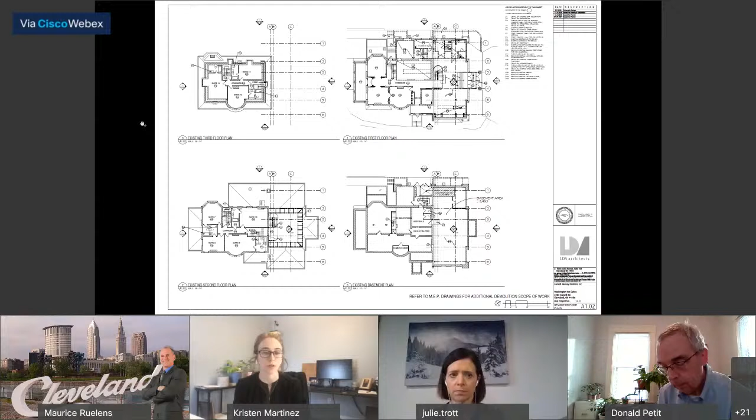Demolition plans, these are pretty much the same as what you guys saw the last time. The existing second and third floors were the previous hotel suites. Those will be remaining mostly as is, with the addition of some small kitchens and laundry areas where we're able to add them. Most of the work is focused on the first floor, adding in the 5 new apartment units. Next slide, please.

Basement plan, this is unchanged from what you guys saw at our last landmarks presentation. Next slide, please.

First floor, one of the big comments from the last presentation was keeping the existing porches that face Murray Hill and Cornell as is. So to do that, we've eliminated one unit so we can maintain the porches. We're leaving the glazing and the storefront as is. You'll still have that transparency between what you're seeing on the street and that stone wall of the historic building behind. And we think this is a better balance of keeping the exterior looking the way it is, respecting the historic, but also lets us respect the historic interior as well, especially the rooms that face Cornell and Murray Hill. So next slide, please.

Second floor, the only change from the last presentation is we've enlarged the sliding patio door plan south to get a little more glazing in. This was one of the comments that we picked up from Little Italy's design review. We are removing the majority of the existing 1984 skylight. We're infilling this with the little common area and adding a roof deck on top. Next slide, please.

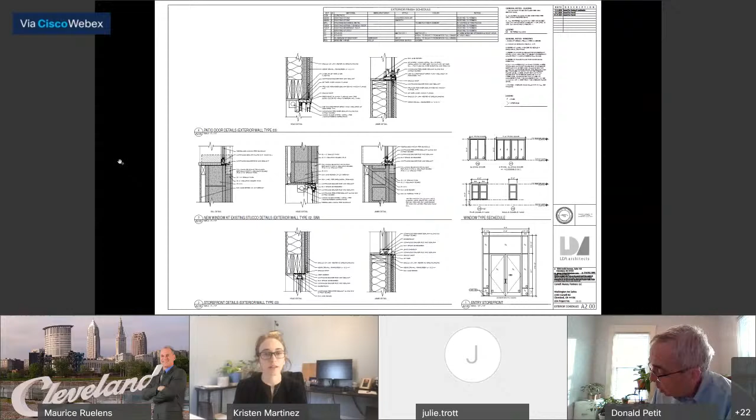One comment we picked up from design review was that instead of seeing a glass railing at the roof deck, they wanted to see a metal railing. So we're showing a dark metal, again that bronze color. This will be mounted to the back face of that partial height wall, just a thin vertical picket.

And then you'll see the modifications to the storefront entry below, removing that curved bulkhead from the 1984 portion, just brightening it up, bringing some more light into the building. Next slide, please.

This is the side that faces Murray Hill. Again, you'll see the common area deck to the right side. We are modifying that one door that's in the portion of the enclosed porch. We're leaving the glazing as is on the building porches, as well as the 1984 addition. That storefront will remain as is. We are replacing that one door—it's a pretty industrial looking door right now. We just want to pick something that's going to give it a little more of a residential feel. Next slide, please.

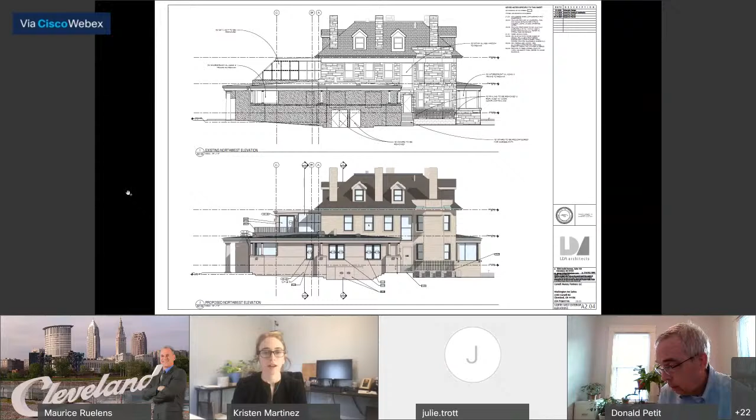The next few slides are sections. We can get into those as needed as we get into the discussion, but at this point, we turn it back over to the commission.

Thank you. Do we have feedback from the local committee?

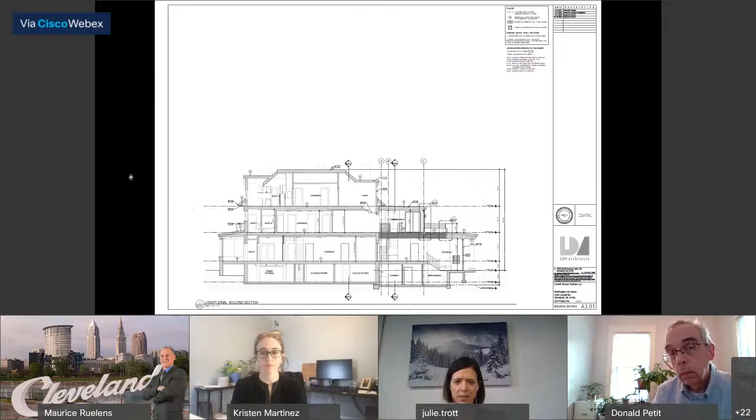I can report that I was at the Design Review Committee meeting on Tuesday. They approved this—well, I don't know if it was unanimous, but it was approved as presented. I think the applicants addressed all the major concerns of the committee and the commission from the last meeting. So it was approved by Little Italy Design Review.

Excellent, thank you. And did I see we have a councilman in attendance with us? Thank you so much, Madam Chair.

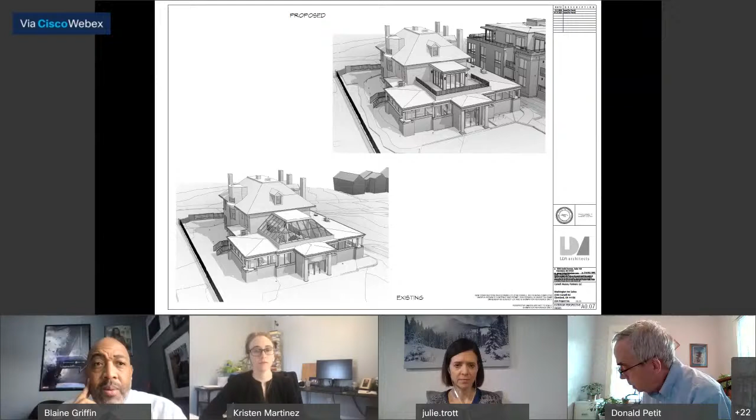I know that the Little Italy Redevelopment Corporation approved it, and I support their recommendation—I also approve. And I know that this is probably not the venue, but I do want to make sure this committee knows that the residents of that area are getting more and more concerned about the plethora of apartment buildings. I know this isn't this committee's responsibility, but I do want to make sure I let this committee know that residents are growing more and more concerned about the plethora of these historical buildings being redone, possibly not within the fabric of the neighborhood. So I'd be remiss if I didn't say that as a representative of the Little Italy community. Thank you, Madam Chair.

Thank you. Any other people in attendance to speak on behalf of the project? Okay, we do have Adrienne Bailey with her hand raised. All right, then we'll move on to feedback from the commission. Go ahead, Ms. Bailey.

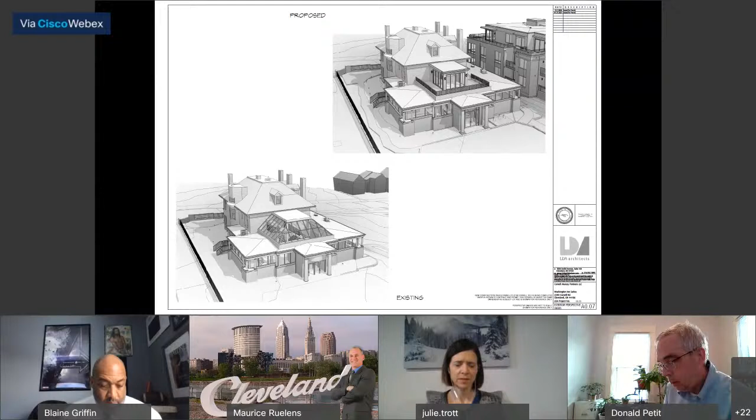I would like to thank Ms. Martinez for listening to the recommendation. I like what's presented, I just have a few questions material-wise from the existing to the new. As far as the existing finish, is all the stone for the whole structure being replaced with stucco, or is some of the stone remaining and just the new structures being replaced with stucco? That's what I'm trying to get an understanding of.

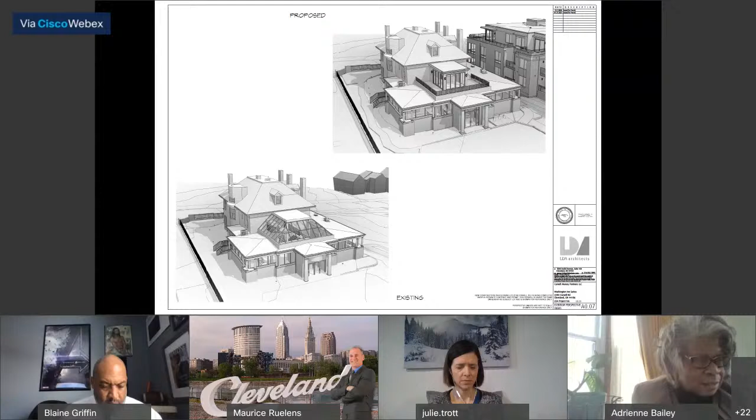We are not touching any of the existing stone. Existing stone will stay as is. I'm looking at your presentation, so just the new addition on the atrium infill would be the stucco. I'm just not seeing some of the stones showing on your presentation for your proposal.

That's fine. You did answer some of my questions for the common space, especially for the railing. Now is the common space going to act as a patio where individuals walk out? Will you have seating in the roof area, or will the common space seating be inside the new structure? A little bit of both. There's a patio area on the second level, as well as seating inside, so we'll have seating on the exterior as well. I would imagine there'd be a little bit of furniture out there.

What type of flooring is going to be used inside the structure? I'm curious what material you're using, inside the space as well as the roof deck. For the lobby area it's going to be tile. When we get into the residential spaces it's going to be carpet. It's existing carpet right now inside.

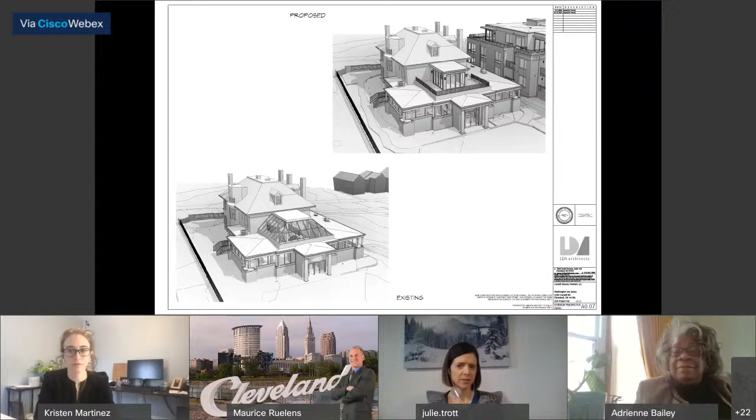Thank you, Madam Chair. I understand there is a high demand for rental housing in this area, there always has been, and because of the institutions nearby that will continue to be the case. I'm not enthusiastic about cutting up a stately, elegant mansion basically into 12 units. I understand the demand, it's just we've had a history of doing that in the city. We certainly cut up a lot of houses in Ohio City, Detroit Shoreway, Hough, and probably a lot of that exacerbated the decline of some of those communities. That said, in this area I don't think these apartments are going to not be desirable, but I don't applaud it. Again, I'll support it, but somewhat reluctantly.

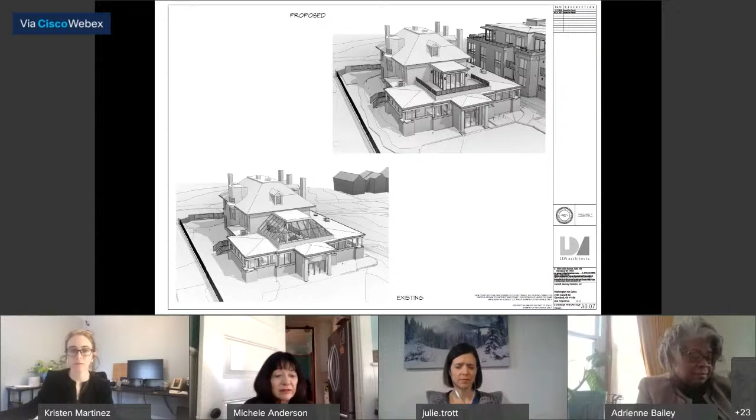Thank you, Ms. Anderson. Other questions or comments from the commission? Mr. Strickland? Thank you, Madam Chair. The only question I had was the fence on the eastern boundary of the project with the adjacent neighbor. Will that be replaced in kind, or will the fence material be different from what's existing?

It'll be different from what's existing. The existing fence is a cedar board-on-board style fence. This will be a green screen fence that'll allow some vegetation to grow up, similar to what we're using next door on the apartment building. The height is about 5 feet or so. It'll take some time before the plantings mature, but we're also showing some evergreen planting along that fence, so they'll be roughly the same height eventually.

Has that been previewed with the neighbor? Do you know their reaction to the replacement? The neighbor is actually under the same ownership group as this building. Oh, that's right, okay, thank you.

Other questions or comments from the commission?

I don't see any hands up. Oh, Adrienne again? Miss Bailey? I was gonna make a motion.

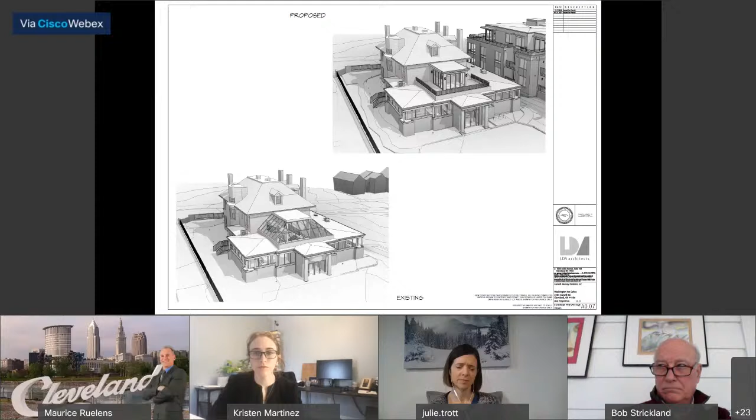Okay, go ahead, and then I'll make my comments in the next portion. Do you want to make the comment, then I'll make the motion?

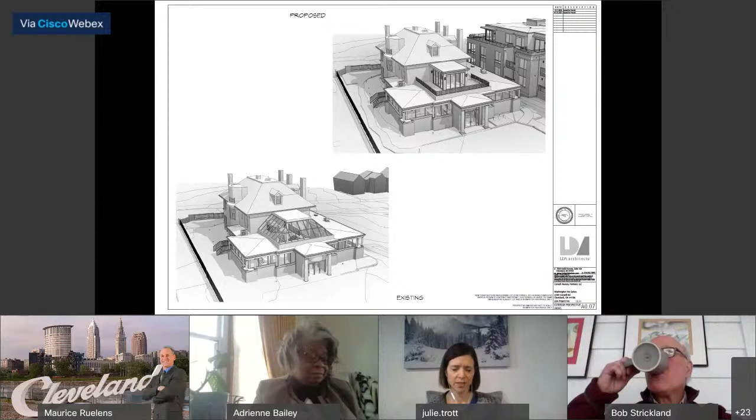Sure. I just wanted to say that I appreciate the ownership and the design firm listening to our feedback. I think we're all saddened that we're losing this for a more public use, but appreciate trying to maintain, at least from the exterior, the original or the current look and feel of the establishment. Those are all my comments. So go ahead, Ms. Bailey.

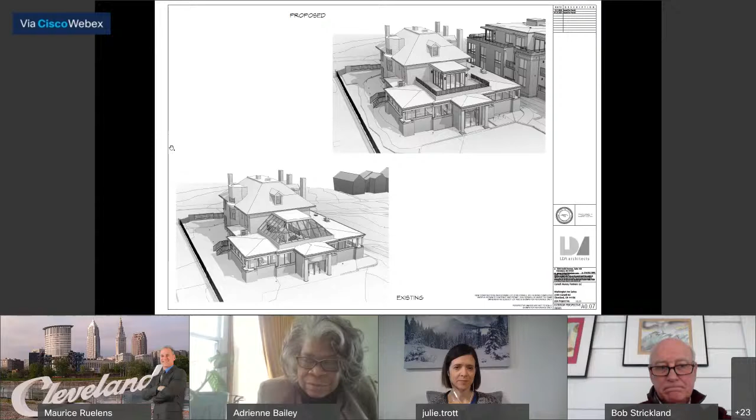I would like to make the motion to accept the presentation as presented. I would like the architect to give staff more information on the material, on the common space for the roof, the window information as far as color and materials, especially for the fence, as well as the ground fence. Could you give the color, even though the vegetation isn't on yet, it's going to grow in. I'm assuming there's going to be some color on it before the vegetation is on it, so share what color it's going to be, or the final color, with the staff. So that's what I have for now.

We have the motion on the basis of submitting additional information. Do we have a second? Bob Strickland, I'll second. So we have a motion and a second. Any further discussion?

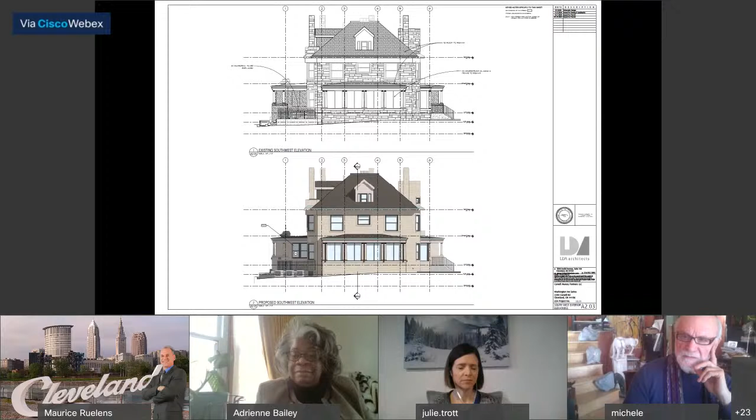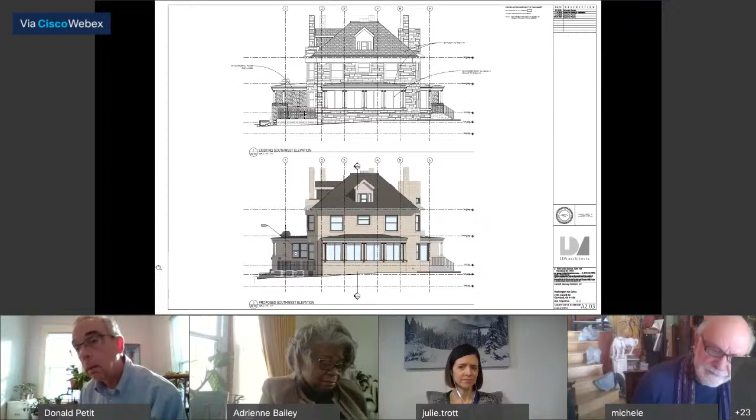Ms. Anderson, yes. Ms. Bailey, yes. Mr. Colicchio, yes. Mr. Dryer, yes. Mr. Strickland, yes. Mr. Tarasik, yes. Ms. Trott, yes. Madam Chair, the motion passes unanimously.

Excellent. Thank you. We look forward to seeing the progress. We'll move on to our second applicant, located at 500 West St. Clair Avenue, Waring Block. Storefront and entrance renovation for Aqua de Lucia Restaurant.

Could the applicant please use the raise hand function and unmute yourself and tell us about your project? This is Bob Bako with HSB Architects. How is everybody doing this morning? Hopefully fine. Good, thank you.

We were in front of Landmarks probably a month or so ago to present the exterior steel and glass canopy, which we received approval on. Now we're back in front of you today after a meeting and discussion with Tom Yablonsky in the Warehouse District. We're looking now to renovate a couple of storefronts, three storefronts along the West 6th and St. Clair facades. If you want to flip to the next slide, please.

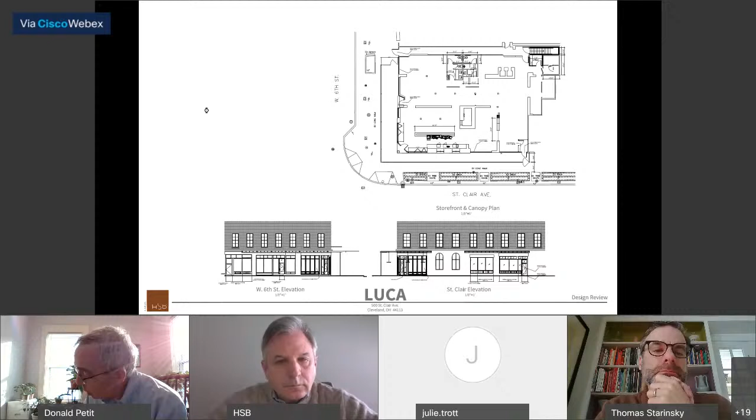So we've presented this to the warehouse district and received approval. Now we're coming to you to make sure that we're okay to proceed. Questions? Do we have feedback from the local design review committee?

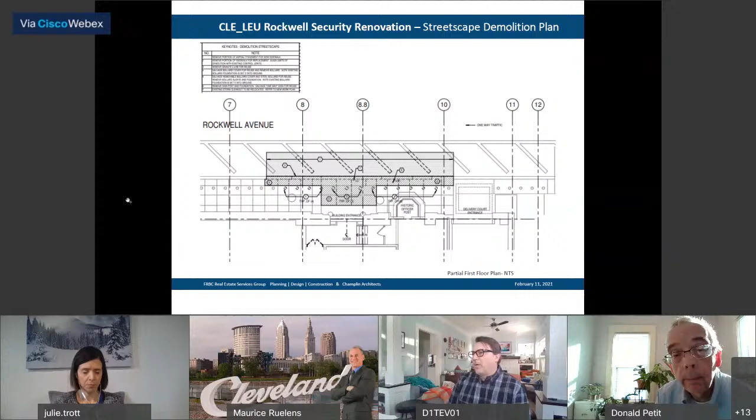This just shows the position of the officer post is centered on the entry. We're allowing 6 feet clear between the entry and the officer post. The intention, this is not intended to be a delivery door, it's just for the officers and staff or contractors coming in. We're actually looking to upgrade this entry for potential future use as a second entrance in addition to Superior, especially because of COVID, so that everyone's not entering into one spot.

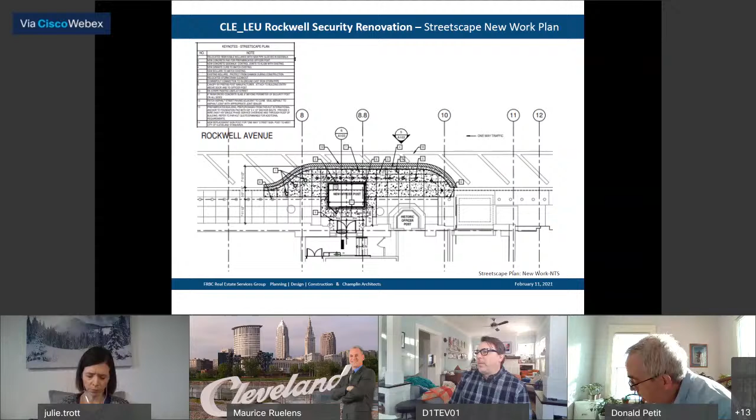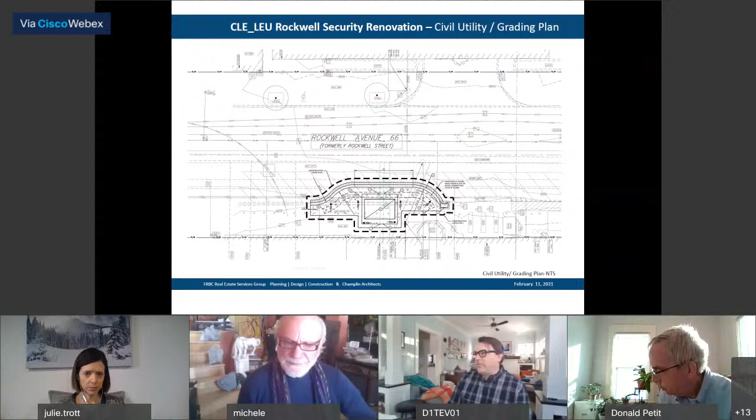There was a comment in the design review about why we weren't taking the entire striped off lane. Our security team was concerned that we were blocking this lane because it allows for some flexibility for vehicles. So we were trying to keep that bump out to a minimum to allow for flexibility in the future. We'd rather have that flexibility than the extended sidewalk.

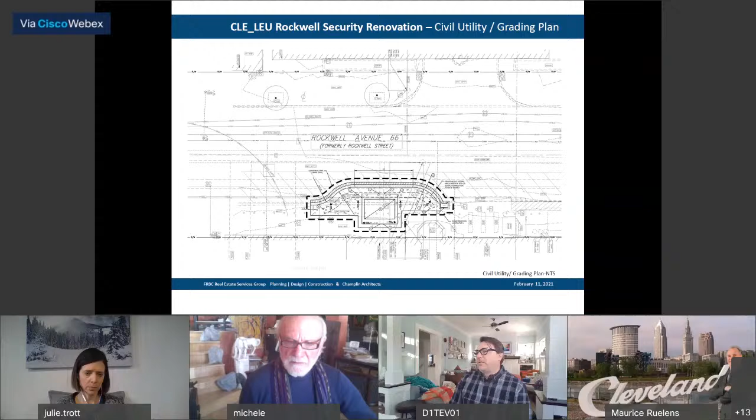There's also actually a 42-inch water main we're trying to avoid. This just shows you the curb detail. The intent is to do new concrete in the 2x2 grid to match the existing sidewalk, and then new granite or salvage granite for the curbs.

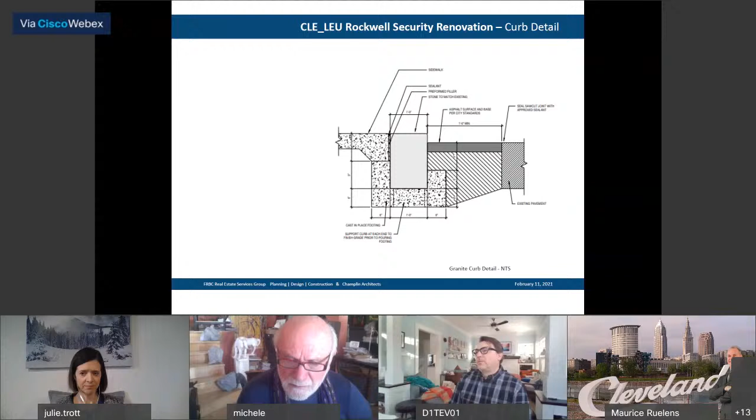The next one is the bollard detail. The bollards have to be quite sturdy for security purposes, so the footers are going down 5 feet. This just shows how we'll be reusing the bollards and also buying new to match.

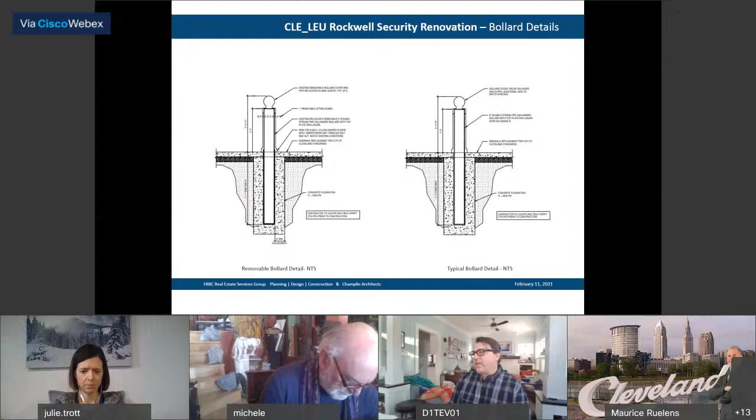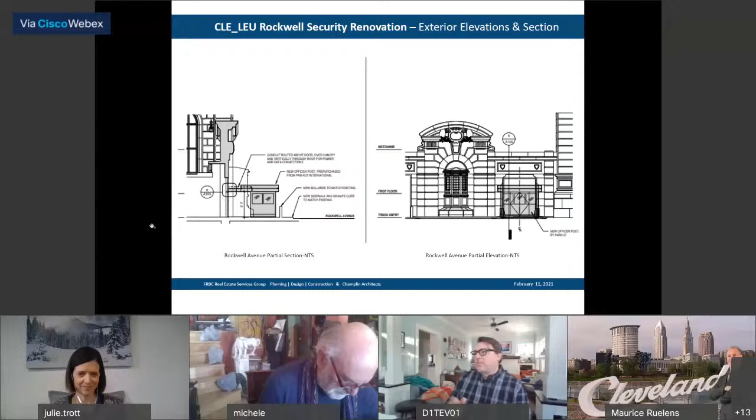This just shows you the only place we're touching the building is in the bronze panel infill, anodized bronze panel infill that was done in the 90s as part of the renovation. So this canopy, it's a 6x6 foot canopy connecting the pre-manufactured booth with the building, just to give officers some cover when they're going in and out of the building.

The design review had asked us about how that would be drained. We're pitching it back to the booth. We're not expecting a lot of water to collect on that, and there's a drain to the back of the booth that would be connected to the storm sewer.

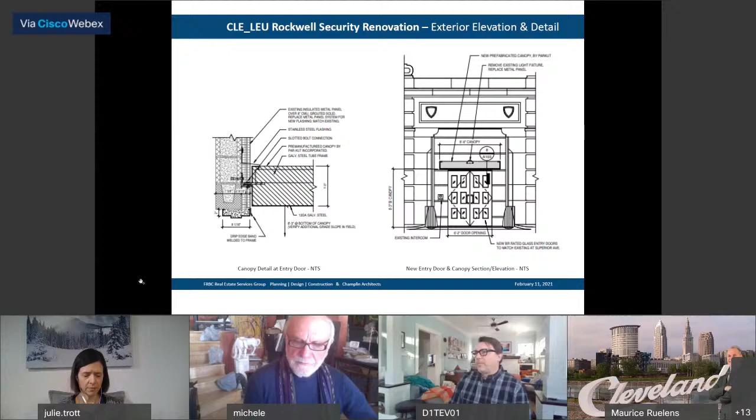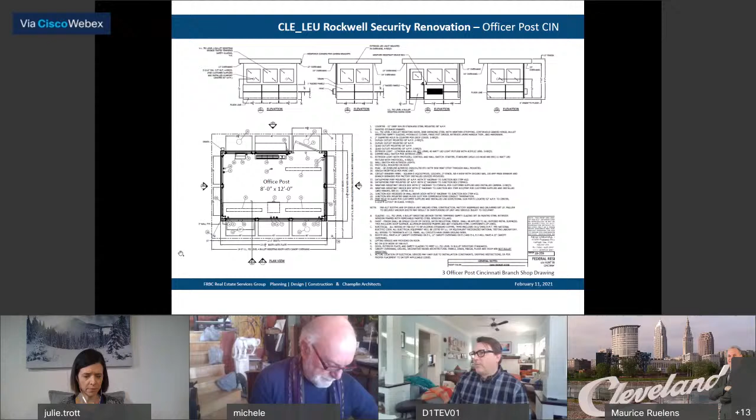This is just the shop drawing from the Cincinnati post, the 8x12, just to give you an idea of the dimensions and how it's fit out. Our post will have the double parapet detail to match the one we have. Per the design review comments last week, we're going to go with a horizontal banding that I'll show you in a rendering to tie in with the existing building.

That's it, that's all I have. Open to questions.

All right, thank you very much. And feedback from the local committee.

Madam Chair, this was reviewed and approved by the Downtown Flats Design Review Committee on February 4th. They did have some conditions, some of which I believe were addressed by Mr. Revider this morning. The conditions were that they study extending out the new curbing to provide more pedestrian space if allowable, detail the roof drain system and ensure rainwater is managed appropriately, provide details and design elements on the guard station which make it feel more contextually appropriate to the adjacent historic building, either in contrast or similarity, and that the design of the guardhouse should complement the new entry, with the design needing to be further explored as to how to better achieve this. It was approved unanimously with one abstention.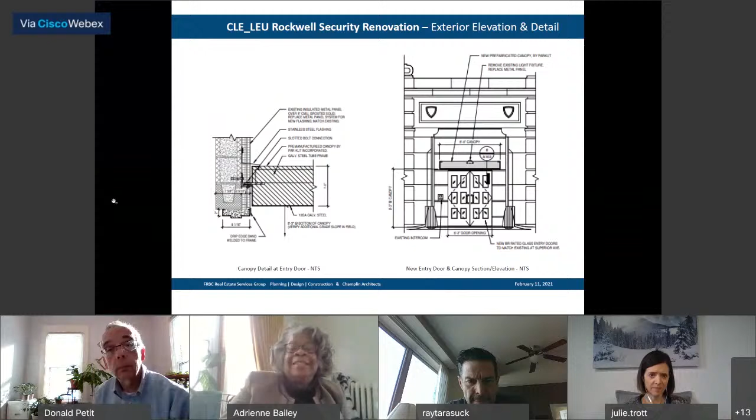I think that's the one. We'll back up for a second. I guess I want to see the one that is being removed, just to get some perspective. That might be on the previous slide. Yeah, right there. I walk by there every day, and quite frankly, now that I see these pictures, I'm embarrassed to say I'm losing my perspective on it. The one that's being removed is not the very first post as you're heading west on Rockwell. That's the second one.

We only need a single person to basically greet people and tell them, you know. Okay, that was my question. I was under the impression that was the one going to be removed, and I was curious how the traffic flow works, because I believe that's where traffic that goes in and comes out stops at that point. Exactly, so that one's remaining. It's the other one, and I realized it when I saw the overhead - I'll call it an atrium, that glass atrium, that's a little further down the building. Okay, thank you for putting that perspective for me, I appreciate it.

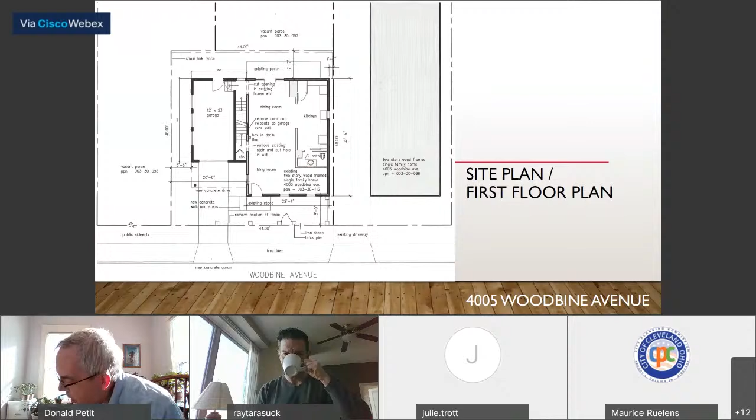That point was less than 6 feet. Please back up one slide. No, go backwards, one more backwards. Okay, this is the east side that was added in order to get sufficient height in the bathroom to be able to have a shower. We looked at possibilities of adding a stairwell along this east side. The face of the project you are about to see will be approximately halfway between the wall and the canopy above the side door. You can go to the next slide, please.

As time went by, John experienced some damage to his car that was parked on Woodbine and began to think he would like to have a garage. The problem was that the north, east, and south yards were only about 8 feet, too small. But east of John's lot was a vacant lot, and John was able to strike a deal and purchase 12 feet of that vacant lot.

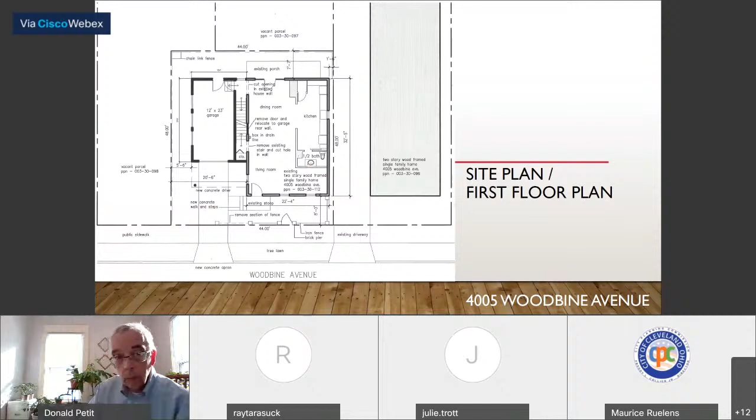Next, we have placed the addition so the north elevation is coplanar with the existing house. This will allow the original house to be the dominant element as seen from the street. At the second floor level is a master bedroom with a walk-in closet and a master bath. A glassed-in sitting area looks out on a small deck that is accessed from the bedroom or from the stair landing. It'll have a traffic-bearing waterproof surface, and railings will be black steel pipe with aircraft cable horizontals.

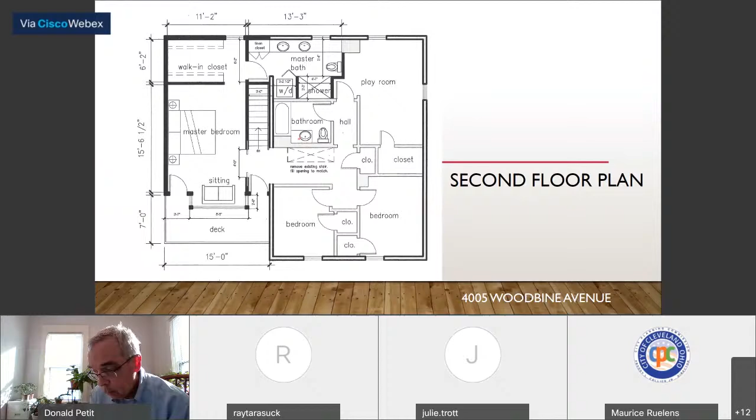Next slide, please. The addition will be clad with board and batten siding, and trim will be painted. Windows will be aluminum clad wood windows, and doors will be aluminum clad wood doors. Glass will be low E insulating glass units. We are using a hip roof on the addition, which relates to the roof form of the existing house and visually ties them together, yet recedes from the historic house. Shingles on both roofs will match, probably a light gray asphalt shingle. There will be a skylight placed on the hip end for more natural light in the bedroom.

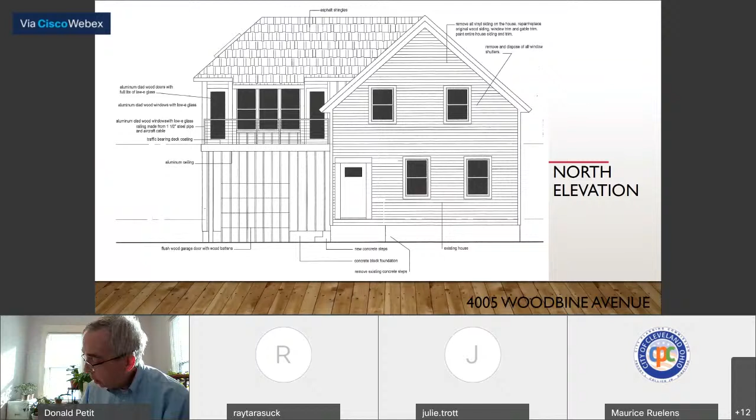The white vinyl windows in the existing house are still very serviceable and will remain. The vinyl siding will be removed. The original siding will be patched, repaired, or replaced. The entire house will be painted. While there are several houses on Woodbine with garages, they are located in very deep rear yards, so the garage doors are only slightly visible from the street. The garage door in our project will be about 8 feet. To avoid the visual issues of garage doors in historic districts, we have chosen to use a flush mount door. Please go to the next slide.

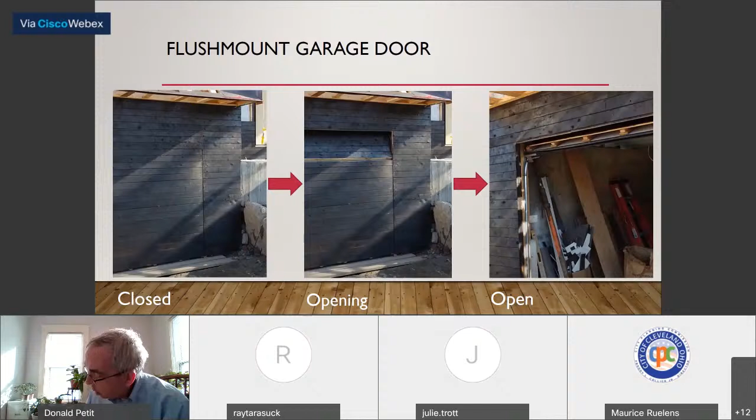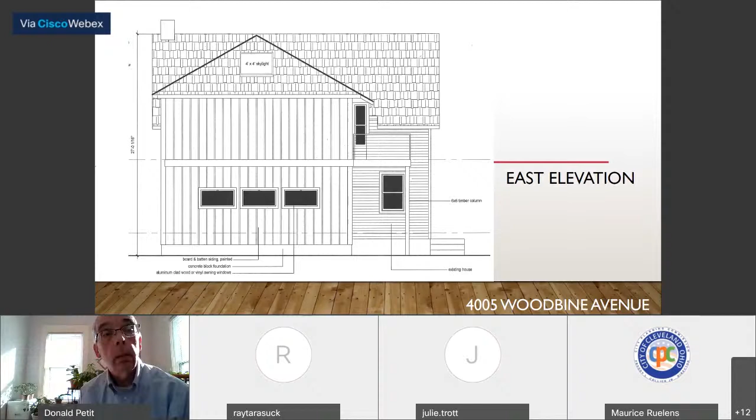This is the east elevation, but I really don't have any comments. It's just the board and batten siding and the existing siding on the house. Next slide, please.

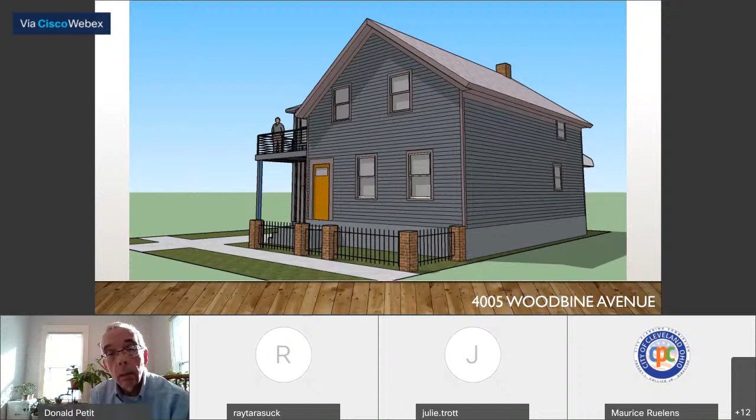Walking or driving east on Woodbine affords a good view of the historic house in all its simplicity. The vinyl siding has been removed and the original siding repaired or replaced, including gable trim and other trim. A lightweight porch is visible beyond the house, as well as... please.

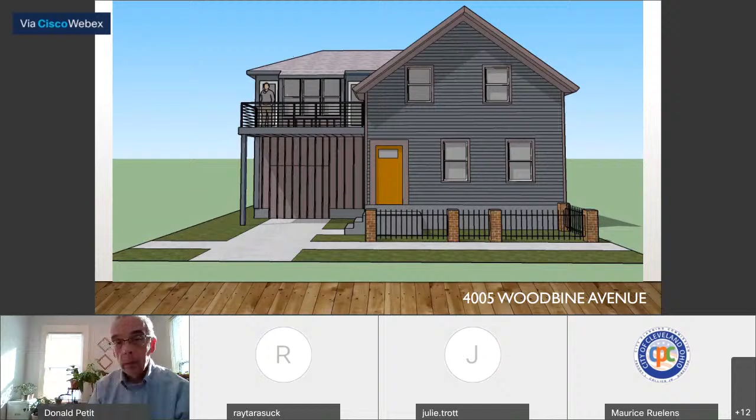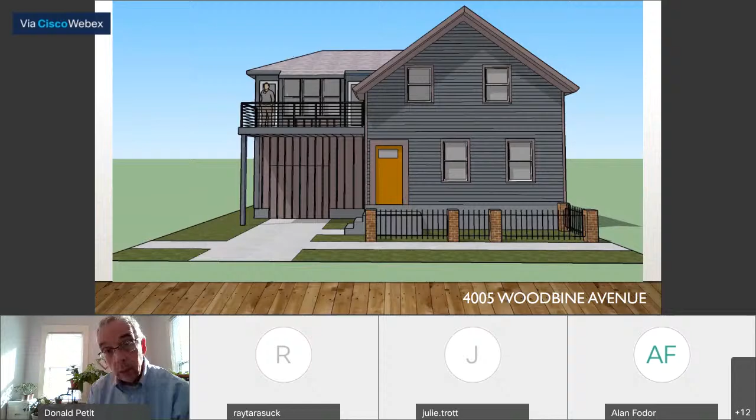When you are in front, the house is dominant and the roof of the addition recedes to the south. Colors are harmonious, but the old and new stand out due to the color change. Next slide.

As you get to the east property line and look, the peak of the house takes the dominant role again, and the roof of the addition fades away to the south. One more slide, please.

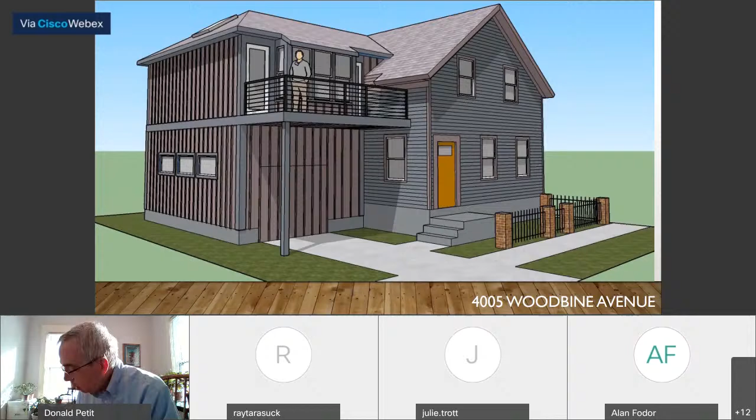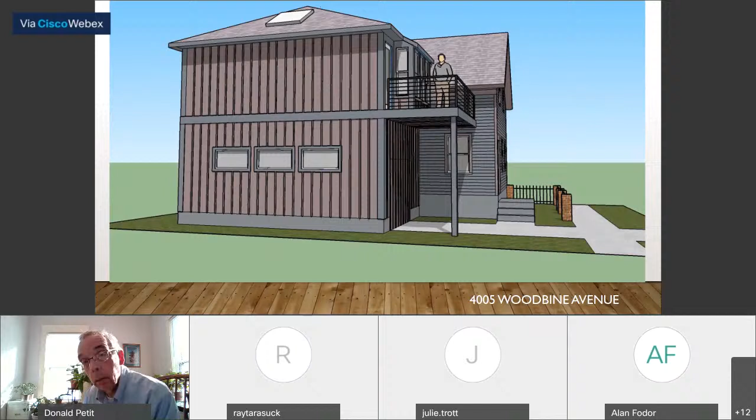Just so that, I don't know if anybody else is having the same audio problems with this presenter, but he keeps cutting in and out. I know that Michelle Anderson just pointed that out. So I just wanted to raise that issue that some of what you've said has been completely missed. I'm sorry to hear that. Well, I think as we go through, you can understand maybe some of the questions. So we will cover it now for anything that we missed. So thank you for the presentation.

Is there feedback from the local committee?

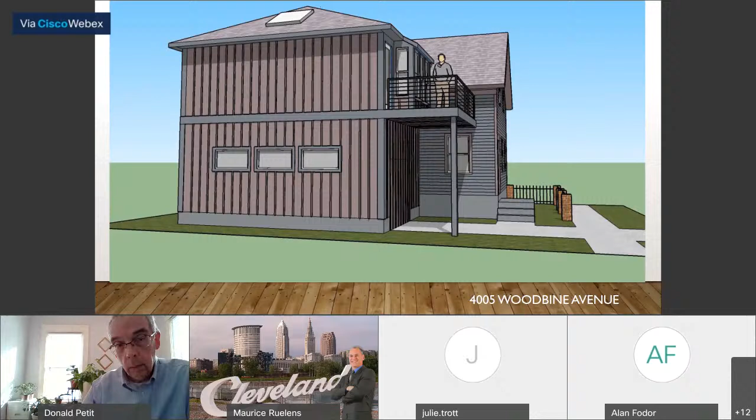Hello. Good morning, Madam Chair and members of the Commission. Thank you for having me. Donna Grigonis from Ohio City Incorporated, the Neighborhood Development Director. So local committee commented that the proposed flushwood garage door with wood battens was very creative, and they approved this as presented unanimously. So thank you.

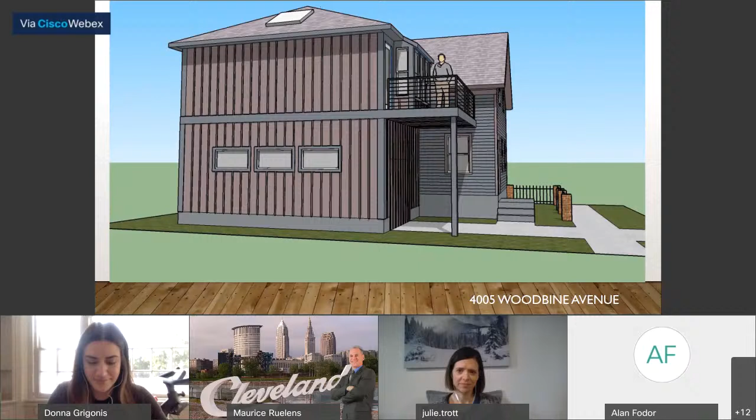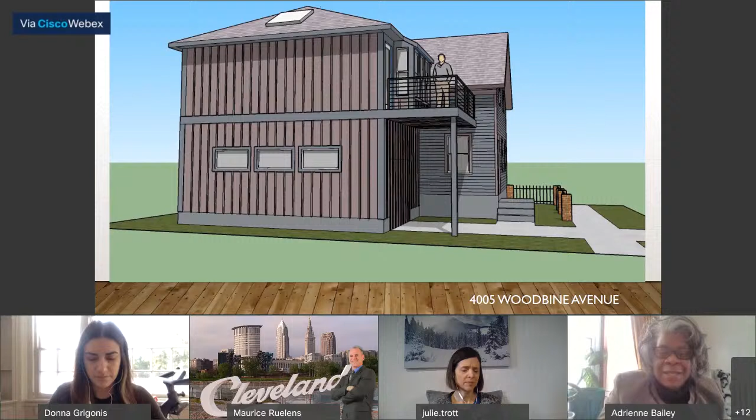Yes, I was also having problem hearing as well. I like the design as well too. I just had some question on the door, what type of material on the front door that looks yellow? Is that the actual color that the architect wants? And I'm just questioning the horizontal position of the window. That's the only thing that's puzzling me. But what type of door material is that, as well as the one on the balcony part at the top, or is that all glass?

Are you referring to the garage door? Yeah, is that bronze? You were breaking up, I couldn't hear what you were saying. The garage door is the same material as the siding on the house. It'll be board and batten siding, just like the rest of the wall that it is in. I think she might be... go ahead. The doors upstairs will be glass doors. Yes.

Is the main front door that in this rendering appears yellow, is that the original door that is a wood door painted, or is this another material? That is the existing door that is on the house currently. Right now, we're planning on painting it the color, I'm not sure exactly what. Oh, okay, so that's the existing door. Okay. Also, the fencing, the brick fencing, is that new, or what's the height of the brick? There is no new brick on this addition. The piers that you see out front are there already. Okay.

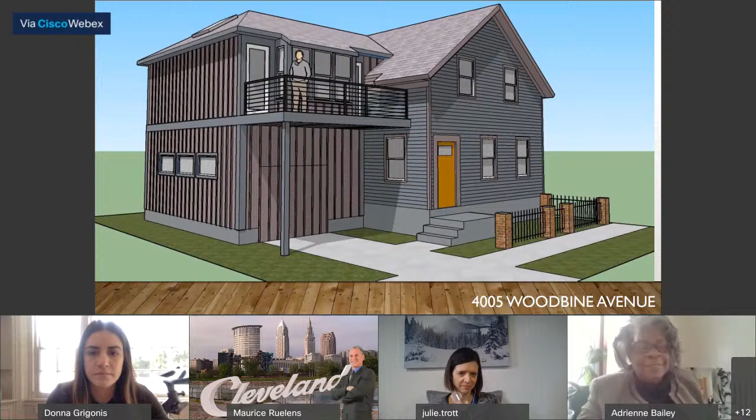I'm really impressed with the door, the flush mount, how you hit the door. I really like that concept, the garage door. It certainly helps when you're in the historic district.

Ms. Anderson, I believe you were next. Thank you, Madam Chair. I really overall like the creative solution you came up with for this addition. I think it definitely maintains the prominence of the original house. I have a couple questions.

You mentioned there were vinyl windows, is that like in the back or on the side where it's not visible? The windows in the house are existing vinyl windows, all of them are white vinyl windows. And there's no plans to replace them with the more historically correct window? First of all, they are still in serviceable condition, they're weather tight. And secondly, the budget can't afford it.

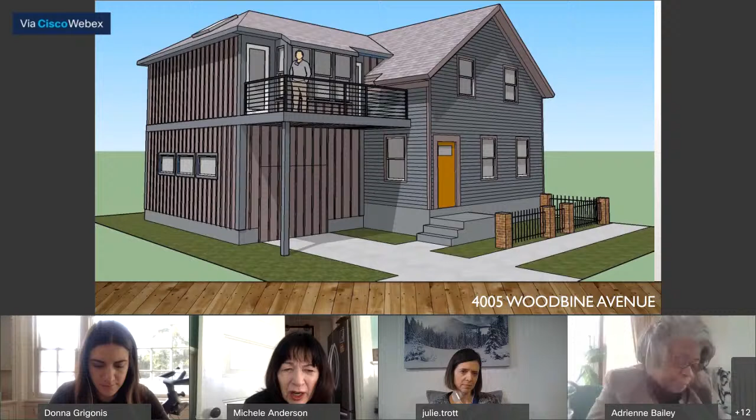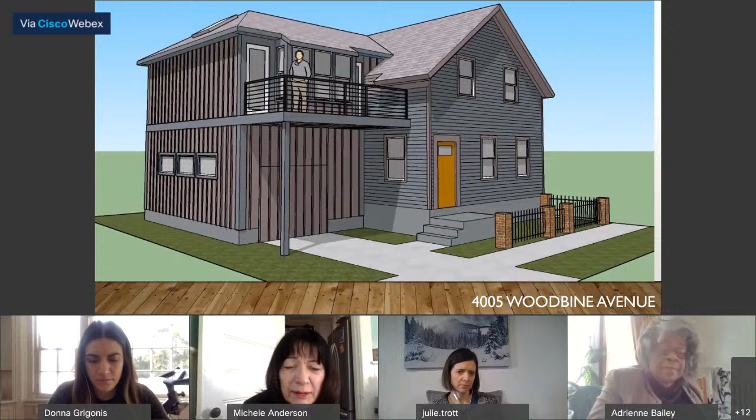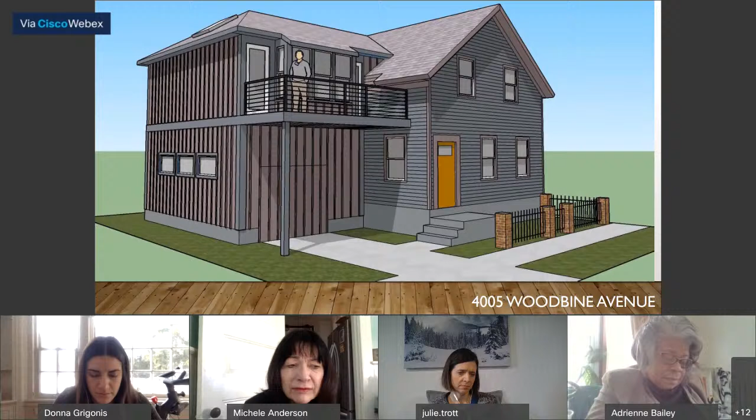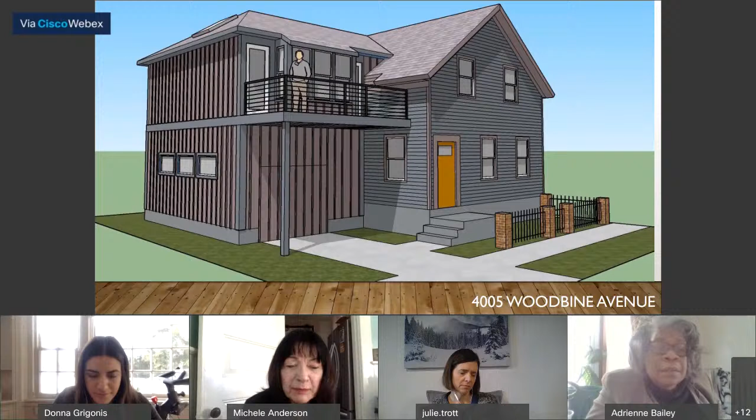Okay. I have two concerns, they're not huge. The board and batten siding is historically appropriate, but you don't see a lot of it in this area. I wanted to know, what is the material of the board and batten siding? It's a plywood, first of all, either wood or composite strips about 3/4 of an inch thick by 1.5 inches wide and set about 12 inches apart. Okay, so this is not like a Hardie board, it's a plywood, painted plywood?

I'm sorry, you faded again, please. Sorry, my turn, right? So this is a painted plywood, it's not like a Hardie board or? That's correct.

Yeah, I'm not loving the board and batten siding. I know it's a historically appropriate use, but it's not common in this area. And I feel like you could probably just continue with clapboard because the addition is differentiated from the original house, with the roof line, with the hip roof, as well as the differentiation in the foundation. The foundation, of course, is higher on the original house.

We looked at it both ways. We looked at it as the clapboard siding. My client prefers board and batten. And I'm a little concerned about the painted plywood in this area because we do have a lot of moisture and a lot of rain, a lot of humidity.

Well, the only thing I can tell you is I renovated the house back in 2002 and it's exactly as we're going to use it here. And in that time, I've had absolutely no deterioration of it. It's finally gotten to a point after 18 years of needing another coat of paint, but it has weathered very well in this particular.

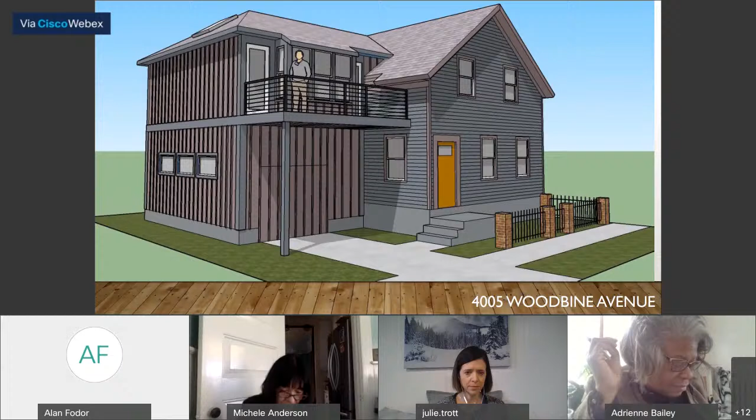And back to Miss Anderson's comments on the siding, clad wood for your siding, is it pre-treated wood? Back to Miss Anderson's comment on your wood, is your clad pre-treated? The protection against since you're not using Hardie board for siding, is your wood protected? The answer is yeah, is it pre-treated wood?

No, the plywood that we will be using is called MDO plywood. It is a waterproof plywood used for making exterior signs. The battens that we put on, we're probably going to use a composite material, so it does have some form of protection against the weather. Yes, absolutely.

I would like to make a motion. I would like to move the motion to accept the presentation as presented with the colors, the second floor window to the side and second floor, to look at the color for the second floor door next to the railing, the glass, to take a look at that. All this to be presented to the staff.

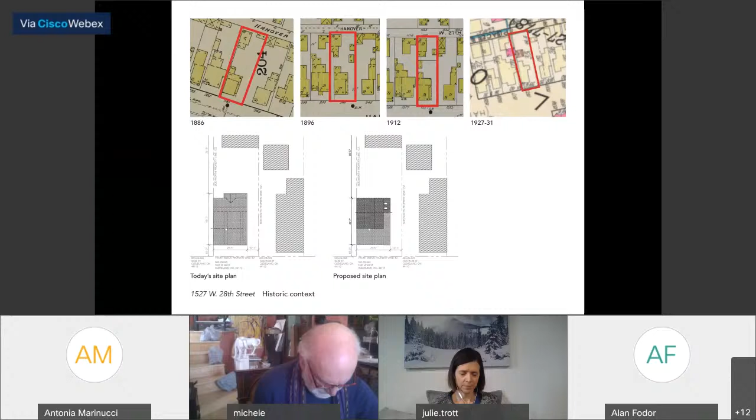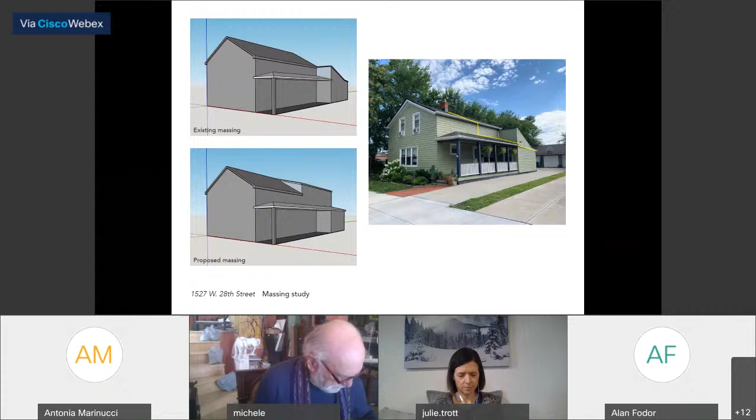So here's a little massing study that we took to illustrate the modification. The goal is, on the main gable, to maintain the ridge line and create an almost dormer effect, an enlarged dormer effect at the rear of the home. We will also be proposing an extension of that porch roof over that rear portion of the home. But the footprint of the house remains the same. We are not proposing any expansion to the footprint, actually reducing it a little bit with that vestibule removal.

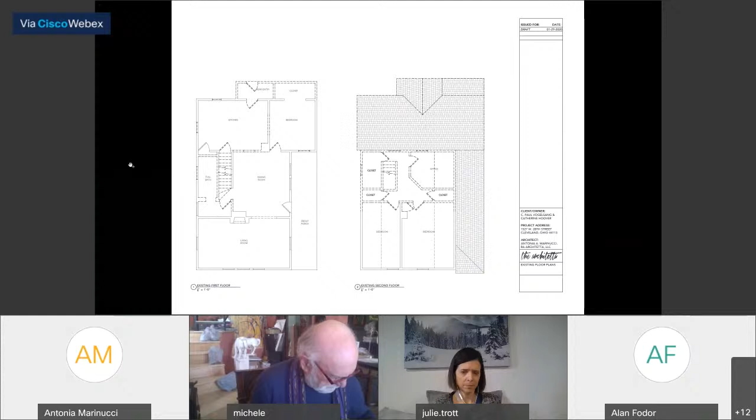One of the big moves that was an impetus for the overall renovation was reorienting the staircase. The current stairs are very narrow, very steep, and we wanted to reorient them to provide more longevity in the house and a more comfortable living environment for them. We're also adding a hall bath and some closet space to that new bedroom suite at the rear. Next slide, please.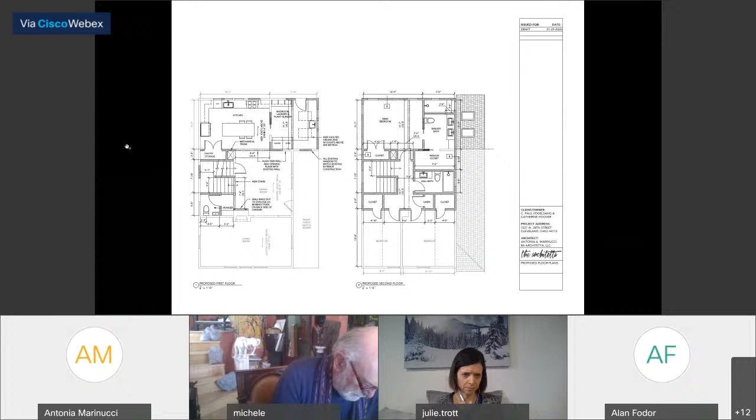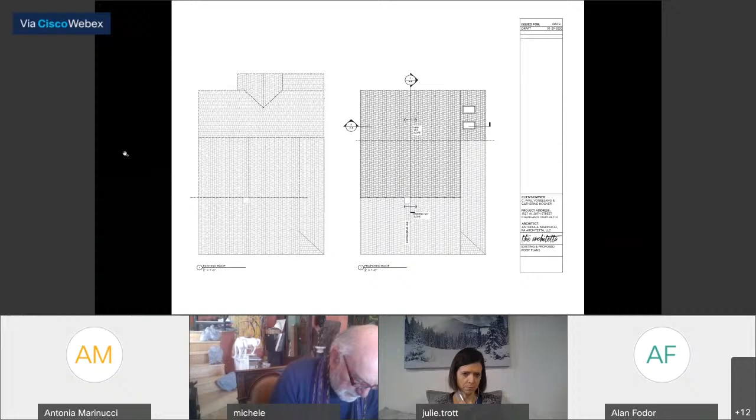So here's a look at the existing roof line. Again, we're maintaining the ridge line of the main gable and taking an expanded dormer approach, going from a 12-7 slope to a 12-3 slope at the rear, and extending the roof line at the porch level to that little first floor space that will become their mud and laundry room, where the skylights are shown. Next slide, please.

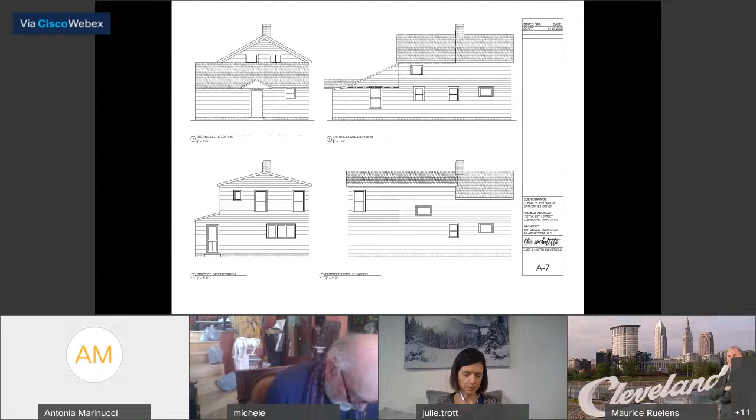Next slide, please. The east elevation, which is the back of the house, the north elevation. It's also worth noting that the east and north sides of this house are surrounded by parking lot. The Cleveland Clinic parking lot is to the east, and I believe it's the West 25th Lofts to the north. So they're currently surrounded by parking lot on both of those sides. Here you can see the simplification of the rear, as well as that kind of expanded dormer effect on the north.

Next slide, please. We're really aiming to just match all of the existing finishes. They had the majority of the windows in the house replaced and also the roof replaced, I think, in the last 5 years or so. So our proposal is to just simply match existing. The existing cladding is a wood cladding, painted green sprout, Sherwin-Williams.

We would continue that in both materiality and color throughout the whole project and in the affected areas. We are proposing white aluminum clad wood windows. I know that white is not always the preferred, but since they're maintaining so many of the windows that they had recently replaced, we would like to propose to match. They don't plan on changing the overall color scheme. I think that concludes my presentation.

Okay, thank you. Feedback from the local committee.

Good morning again, Madam Chair and members of the Commission. Donna Grigonis Bailey with Ohio City Incorporated. At local committee, there were not too many comments, but there was some conversation about the color of the windows. But Antonia did explain that since the owners are not changing the existing windows, that it made more sense to keep them white. It was approved as presented.

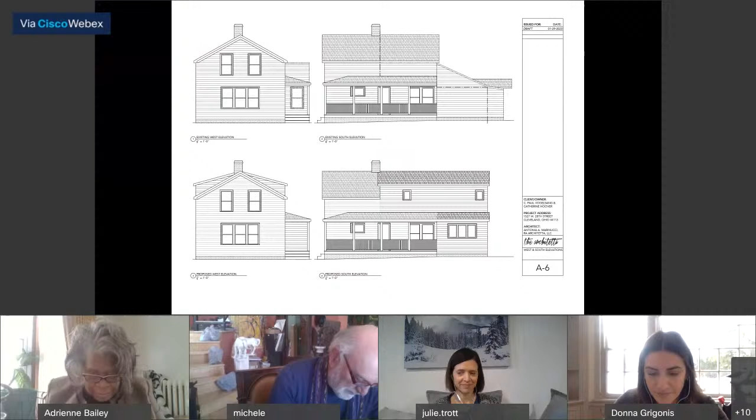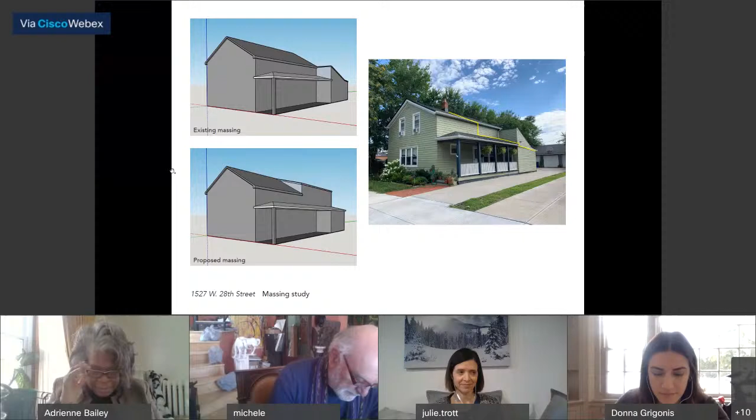Could you go back, I think either 1 or 2 slides? Go back 1 slide forward. It's a color slide. Forward. Go back. No, not quite—go almost toward the end before we went to the material. Right there. Wait. Go back 1. There. Right there.

I have a question about the elevation on the upper left. The two upper windows—are those existing, right? Correct. The upper left is the existing. Okay, all right.

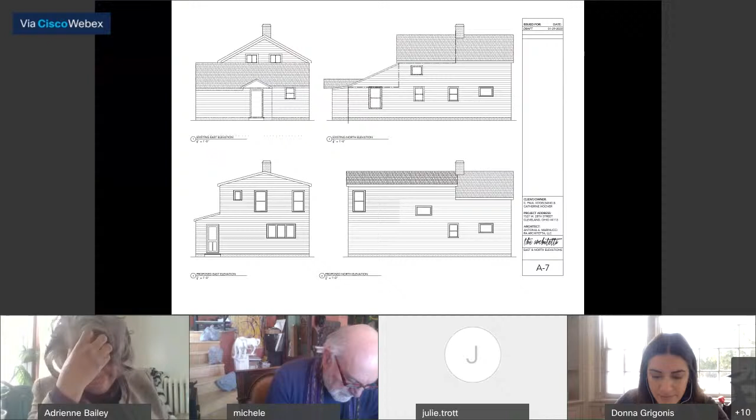So the roof that you added in below it is new, right? I'm just wondering, I guess it's not much we can do about that, just how—it's just the roof line is so close to the bottom of the window. So I'm just wondering how the existing looks, or how low it is. Is it the same height as the window I'm looking at, or in the right of that elevation? Is it the same height?

I'm not sure, I'm a little bit confused. The existing will be removed. The two windows on the left, even though they're existing, I'm just curious how high it is. It's so close to the roof line, if that's a new roof that you added on there. So I'm just wondering if somehow the edge of that roof line can be lowered, so there can be a gap between the bottom of the window and the top of the roof edge.

So you're looking at the existing? Yeah, the existing window. Correct, but all of that will be removed. So that plane—wait, let me turn my microphone off. That plane that has those two windows and the entire roof line in front of it, that is the shed roof line, that is all removed. So when we do the addition, we'll be expanding, so the back plane of the house will become flush with the first floor of the house. So those windows and that roof line are the existing condition, but they will no longer be there. The lower left, showing the proposed east elevation, is the proposed rear facade that will all be along one plane. Does that clarify?

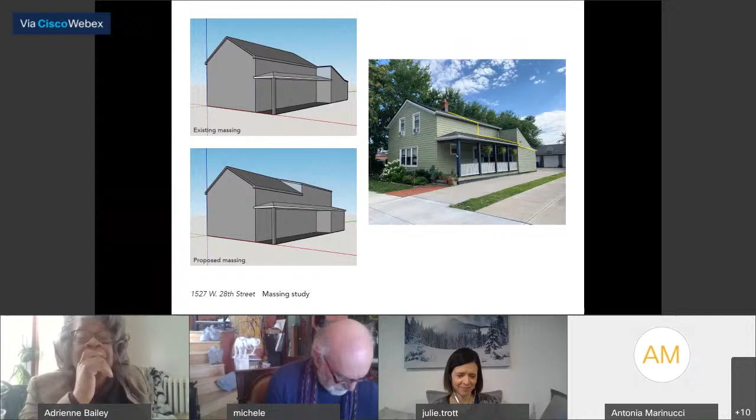Sure. Carl, can you go back to the very first slide? Miss Bailey, can you mute your mic, please? Oh, okay. Carl, if you could go back to the first slide that shows the existing photos of the rear, I think that might help clarify. The back of the house currently is a little bit of a mismatch of things going on, and I think that's what's causing the confusion at the elevation level. Keep going.

I hope that helps clarify. Actually, I was talking about the higher house roof pitch—it had two edges, the black one and the roof edge, which is the white part. So it's the white edge of the roof, and then the roof itself probably with the asphalt. I'm talking about those two showing on your drawing—the higher one, not the shed one.

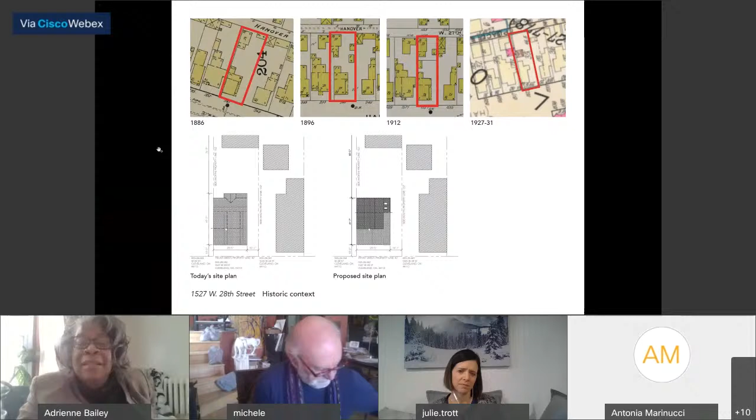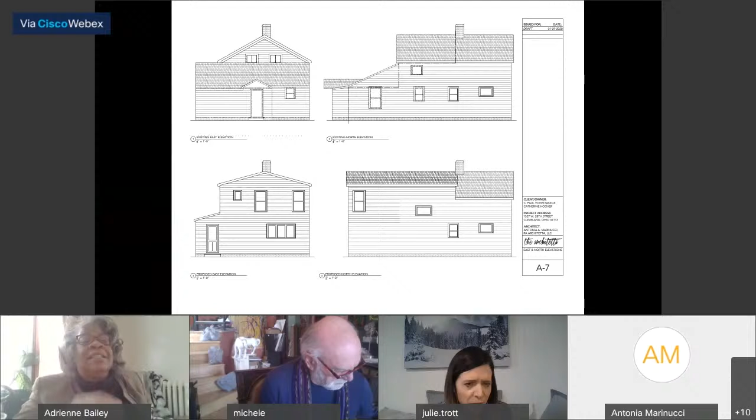Are you talking about the profile of the roof line? She's saying the wood detailing of the profile—a finished board below your ridge and roof line, like a... rake board, not board. A rake board, thank you. That's not shown within your proposed elevations. Let me verify what's on the front facade. The goal would be to still match the profile on the front facade—if there is a rake board on the front, then that would be an error on my part.

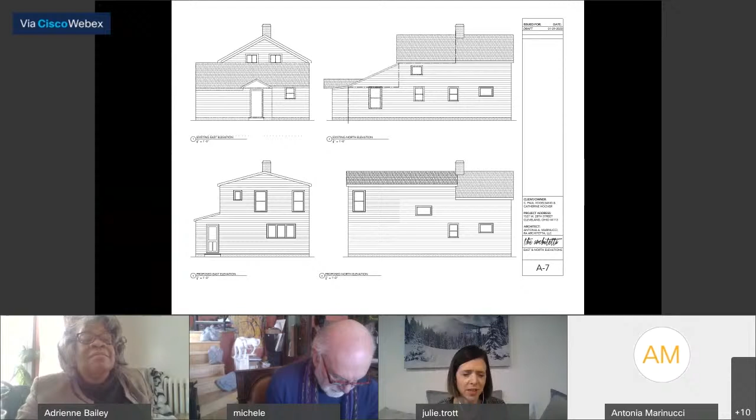I think that's where Ms. Bailey's going—that with your modifications, make sure you're matching the profiles at all corners and roof lines. Correct, Ms. Bailey? Yes. Okay, I can read lips through the mute button. Looking at the proposed front facade, there is a small rake board, so yes, I can modify that when I submit for the permit set to maintain the profile of the front gable at the rear modification. Also, there are no corner boards currently on the home—the wood cladding miters at the corners, which is a little odd for the neighborhood, but we're proposing to maintain no corner boards to be consistent.

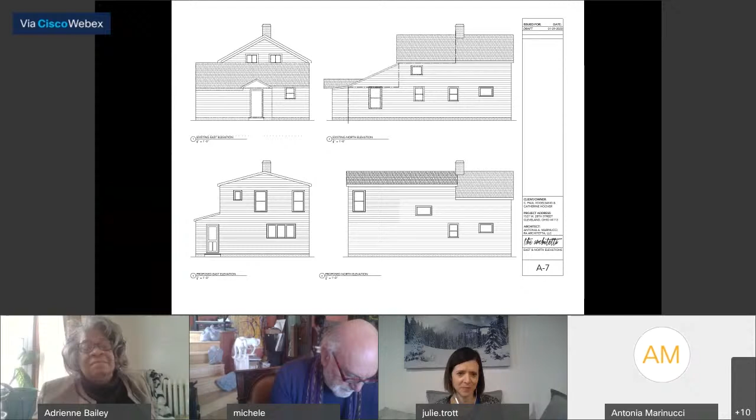So after you remove the shed, the door down at the proposal—is that a new door? Okay, so what type of door, what material? It would be a fiberglass half-light door, painted white to match the rest of the trim work and windows on the house.

Other questions, Ms. Bailey, or should we open to others? No, that's it. Other questions or comments from commission members? I appreciate your sensitivity to the simplicity of this structure, trying to expand and meet the program but doing it modestly, especially recessing it far back enough that it's not as apparent on the street front. Those are my only comments.

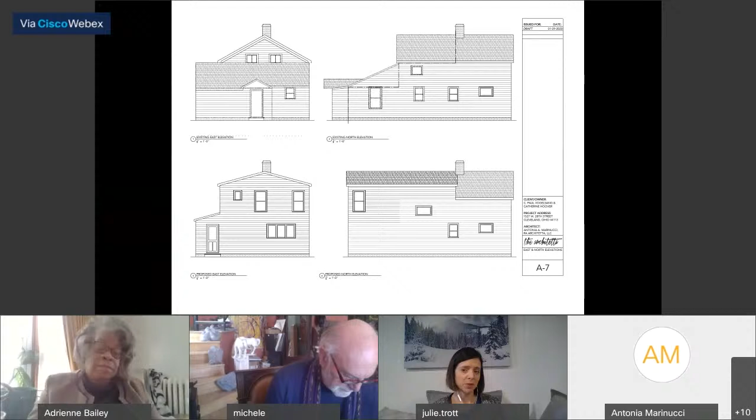If there are no other comments, would someone like to put forward a motion? I'm making a motion—I understand you're trying to help the owner add what you mentioned earlier, widen the hallway, add bathrooms and staircases, so they can stay in their home a little longer. So I make a motion to accept the presentation as presented, and as Madam Chair mentioned, the elevation we just looked at.

If you have any more information on the windows, share that regarding position, double hung or fixed—just study that a little more and share with staff. I understand it's local design review, and you're trying to match the color that's already there, white—I don't have any issue since that's what you're matching, but share that information. Look at the windows more and share that with staff. And if you have any lighting, share that too.

Okay, thank you. So we have the motion with the conditions. Do we have a second?